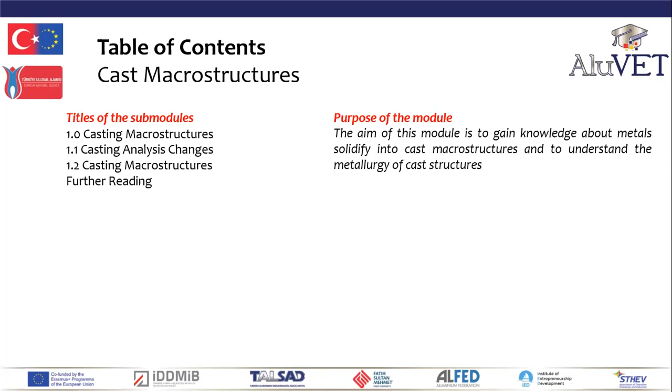In this module, you will understand how cast structures form on solidification, about the macrostructure and the chemical segregation that forms within cast structures. You will appreciate the need for correct homogenization heat treatment prior to wrought working. You will understand how flaws and defects can form within cast structures, and so you will appreciate the limitations of cast structures.

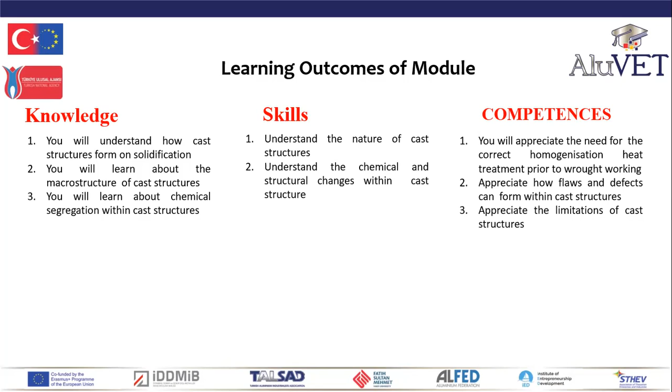In the preceding modules on solidification and on grain size and alloying, we learned how liquid aluminium solidifies on an atom-to-atom scale to form alloys and grains. Cast structures are not homogeneous. They change from surface to core. Both their structure and chemical analysis can vary, and they can be heavily segregated. Thus, cast structures can exhibit variable mechanical properties.

In this module, we shall understand how the structures we actually see form on solidification and understand the nature of those cast structures. This module will explain why we need to apply homogenization heat treatment to cast aluminium before subjecting it to wrought working, such as rolling or extrusion. Now, fusion welds are miniature castings, so it is important to understand what structures they can form within the weldments.

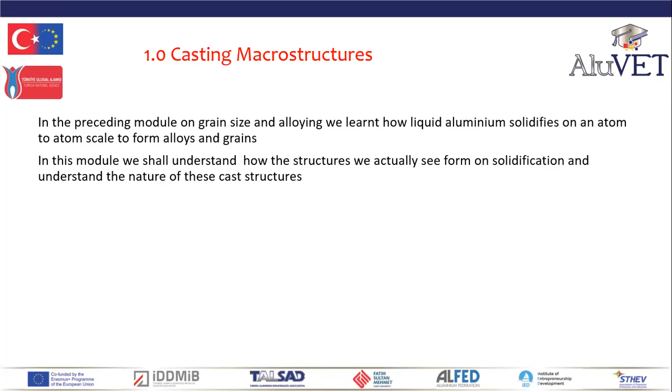So when we pour molten aluminium into a mold, as soon as the aluminium touches the mold walls, the aluminium in contact with those mold walls will instantly solidify, forming small chill crystals. So as soon as the aluminium touches the wall, it's a solid and it's formed chill crystals.

The aluminium solidification starts from the cold mold walls. So nucleate solidification, forming the face-centered cubes, then the lattice, and now chill grains. The chill grains line the mold wall, so they change the cooling rate. Because they line the mold walls, all of the mold, they slow down cooling. They act as a barrier.

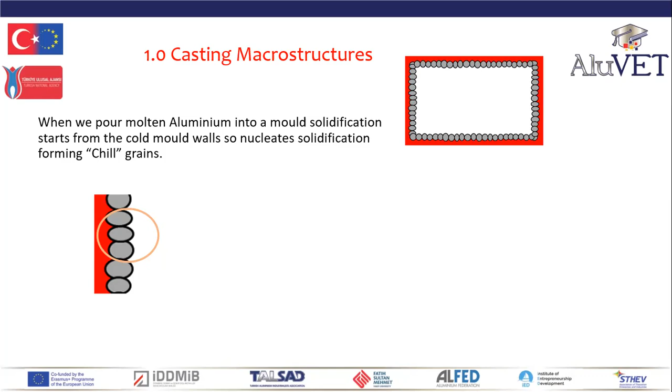The chill crystals have now formed a complete barrier around the mold walls. They have now slowed cooling. The cooling slows, so the next grains to form are long columnar grains. Because the cooling slowed, the solidification rate has slowed down.

So now long columnar grains start to grow inwards from the mold walls to the center of the casting, perpendicularly away from the mold walls. We've slowed the cooling rate down. Now cooling is slower, so we're now growing long grains inwards from the mold walls.

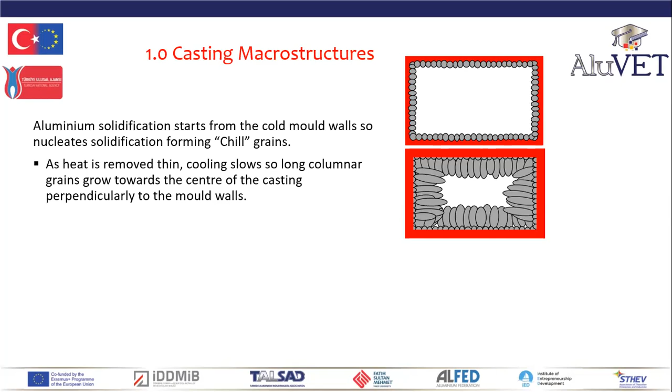These columnar grains grow like fir trees from the mold walls. Like fir trees, they grow horizontal branches with spines that almost resemble pine-like needles.

Now, the solidification during casting is too rapid for equilibrium to be maintained. By that, I mean, as the liquid cools, the chemistry changes from the walls inwards because the cooling rate is so fast. So the columnar grains grow dendrites.

Dendrites are these fingers with spines rich in segregated alloys as they grow. So as they grow, their chemical analysis changes. Because we're cooling so fast, the chemistry of the liquid metal cannot be maintained.

So as the grains grow and they grow inwards, their chemistry changes both longitudinally and in the branches and the spines. Hence, these columnar grains are anisotropic. That means they have directional properties because their chemistry and their mechanical properties vary with growth and the cooling rate.

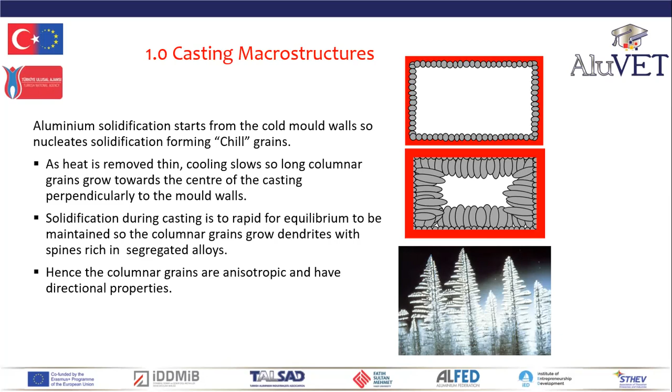Let's look at the chemistry. Now, as the mold wall solidification starts with atoms forming a single cube, the nucleation grows into chill crystals. Now, the analysis of these chill crystals, if you remember in previous modules, will follow the solidus line.

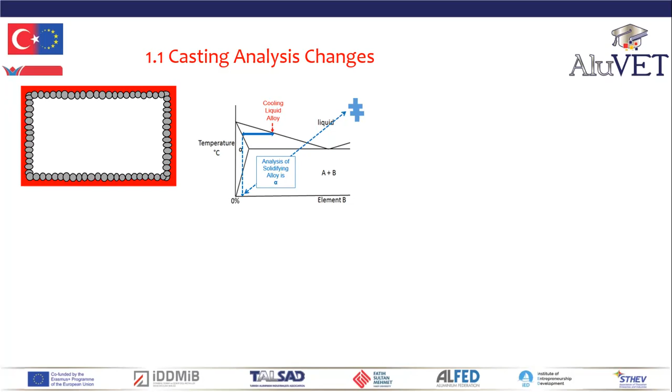So the analysis of the chill crystals will change from the solidifying liquid to that of the solidus line, following that of the solidus solvent chemistry on the horizontal line. Now, as cooling continues and the columnar fir trees grow, the colder metal that solidifies will follow the solidus line.

If you remember in the previous module, as the liquid cools, it drops down and it goes horizontally onto the solidus line, and the chemistry moves towards the solute. So the analysis of the fir trees will change from the chill crystals, and as the fir trees grow inwards and their cooling rate slows down, their analysis will change following the solidus line. They will become richer in solute atoms.

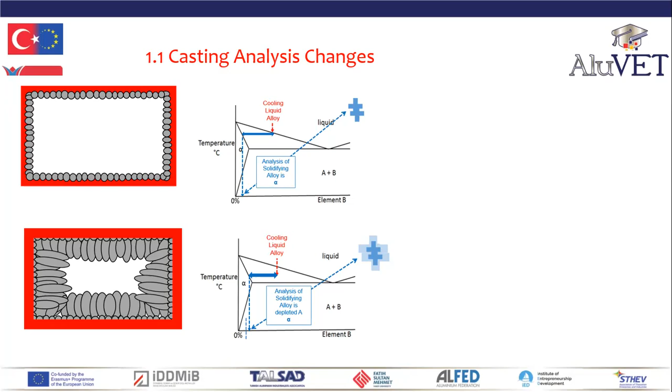Now that means that the columnar grains exhibit a core inner and outer chemistry. So the columnar grain chemistry changes from the mold wall into the mold and into the branches. Now, as we solidify, the solute atoms and inclusions are pushed by the columnar fir tree solidification front into the center of the castings.

As the columnar grains grow, they insulate the liquid metal from the cold mold walls, so the cooling rate slows down more. Consequently, in the center of the casting, the cooling rate is very, very slow, and the cooling now occurs from all directions. The columnar cooling rate is from the mold walls, but in the core, we've got cooling coming from all directions of the mold wall, from all the liquid.

So we now form equiax spherical crystals. Because these crystals are spherical, because in the center of the casting, cooling is from all directions, no longer driven from the mold wall. So in the center of the castings, we form equiax semi-spherical crystals.

These equiax crystals have isotropic properties. That means that they are identical and homogeneous. And equiax crystals are therefore very, very desirable, as they have a homogeneous structure, homogeneous chemistry, homogeneous mechanical properties. And for that reason, we can promote equiax crystal growth by using low pouring temperatures or inoculants into the castings.

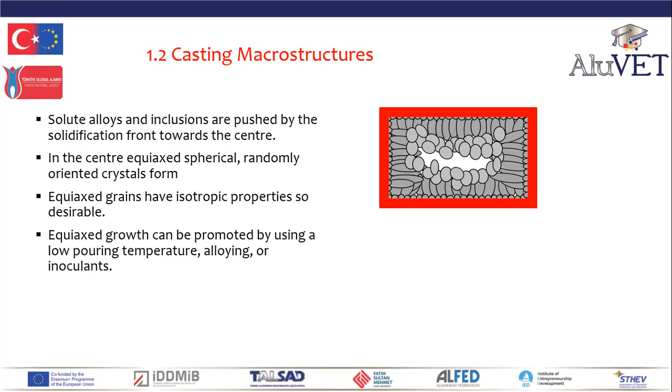Now, finally, as the remaining liquid metal solidifies, shrinkage occurs. Remember, the casting was fed from the walls outwards. We had chill crystals, columnar grains, and now equiax crystals. And right in the middle, we've got final solidification metal. So as it solidifies, it can't be fed. There's no more further molten metal. So some shrinkage will occur in the center of the castings.

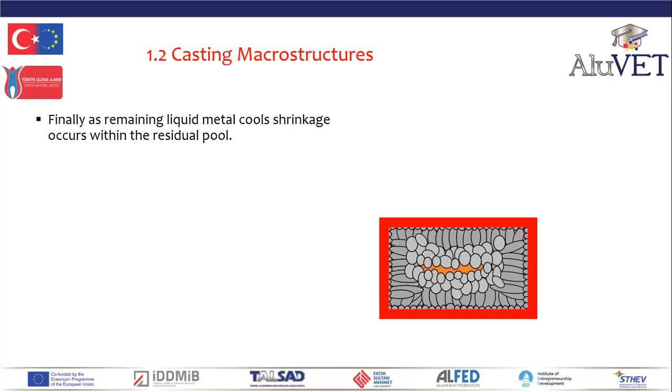So let's now give an overview of casting macrostructures. So during casting, all metals will develop 3 different macrostructures. The macrostructures will all form at different cooling rates. The different cooling rates cause segregation of alloys and chemical analysis during the castings.

So castings are heterogeneous. They have variable analysis. Castings are heterogeneous, so they have variable mechanical properties. And castings are prone to shrinkage and porosity. Now remember, fusion welds, particularly those fusion welds where we're going to add filler alloys, are miniature castings, so they will exactly form the same macrostructures as a casting.